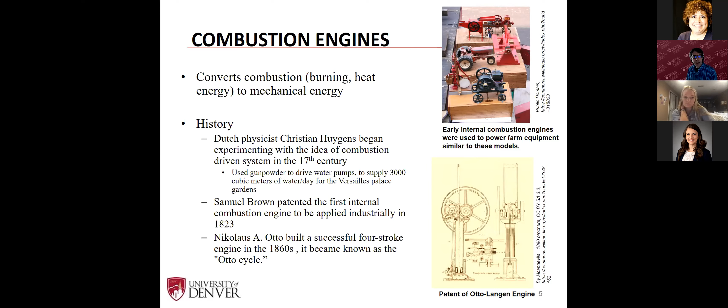We maybe get a third. So maybe a third of that energy in the gasoline goes into making the car run, and the rest of it goes to heat. Your car gets very hot, you have to have a cooling system, and if that goes wrong, all kinds of bad things can happen. So anyway, this is where it started.

A little more on definitions. There's a couple different kinds: external and internal.

Internal combustion engines - Al Gore famously said they're going to be gone, or they need to be gone, if you're worried about the climate, and he got a lot of flack for that. But General Motors has committed, I think by 2035, to not make a single combustion engine. They'll all be renewable or electric or something like that.

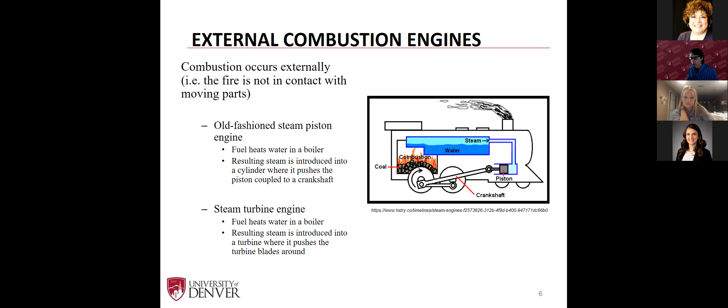And as you know, the wheels on the bus go round and round - I'm guessing you've all heard that song at one time or another. So you need something to help convert the linear motion to rotational motion, and I think that's one of the questions on the quiz.

So internal, just like it sounds, it's all inside. You've got gas, and diesel is a slightly different type of fuel, as you know. Hopefully you've never made the mistake of putting diesel into a gas tank - it's very hard to do, but a friend in the neighborhood did it recently. It's not good. The diameters of the gas pumps are different because they really don't want you to do that.

But otherwise it's pretty much the same - it's fuel with energy, but the big difference with diesel is you don't need the spark. We'll get into more of that in other classes. It's just a property of the fuel, and there are some advantages to that - you can get to higher pressure ratios and so on. Thermodynamics, again, is where you get it. But either way, they're very similar.

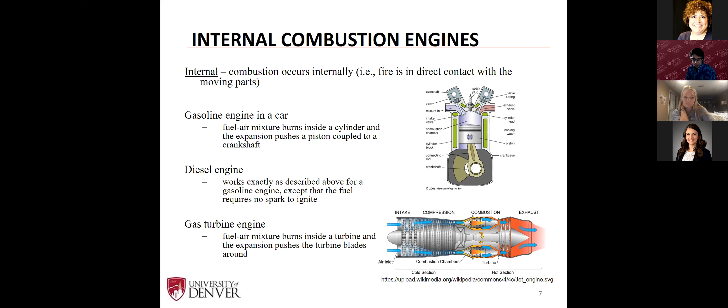What's a little more interesting about this engine is there's a section with a turbine, labeled there. In most engines, you'd extract all the energy you can from the turbine. But in a jet engine, you only want to extract as much energy from the turbine as needed to drive the compression. That leaves a lot of energy left, which goes out the back as exhaust at really high velocity, and that's what propels a plane. It's a fundamentally different process. The combustion part, you don't have the cylinder moving, but otherwise it's definitely an internal combustion engine, and that's why it's there.

All right, next slide, please.

One of the key concepts, maybe you've had chemistry and recognize this, is the ideal gas law: PV equals nRT. Sometimes it's mRT, using mass instead of n, the number of moles or the amount of substance. The key thing here is you've got pressure, volume, and the amount of stuff that's in there. R is a gas constant, so that's not changing. And T is the temperature.

So if we close off the cylinder—in your car, the valves are opening and closing, we'll get into that more—at some point it's all closed, and that's when combustion occurs. So N is constant, the amount of stuff in there is constant, and R is always constant. If you ignore N and R and just call it a constant, put T on the other side, we know PV over T is constant. This helps us work through how things go. When you ignite, the temperature increases, and if the volume doesn't have a chance to expand right away—it happens really fast, so imagine it's constant volume—if temperature is going up, the only way to maintain that constant is to have the pressure go up. We can be more accurate than this, but it's good for predicting trends and understanding how things work. High pressure leads to high force—pressure is basically force divided by area—so if you've got high pressure pushing on the area of the piston, that's what makes it go.

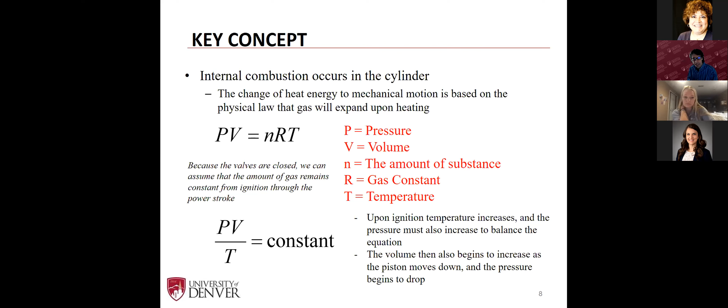So, all right, next slide.

Another key concept—we talked about how almost all engines... I don't know how many of you know about the old Mazda rotary engine. I don't know if they still make it, but Mazda was about the only one with a rotary engine. The idea was, if we start rotary to begin with, we don't have to waste energy going from linear to rotation. But pretty much every car is linear—the pistons just go up and down—and eventually we want to turn that into the wheels going round and round. That's where the crankshaft comes in; it could look like a U in some cases. But in general, this is just how we go from linear to rotation, and there are some losses. Even if you got all the energy of the gas that you wanted, you're going to lose some in this process.

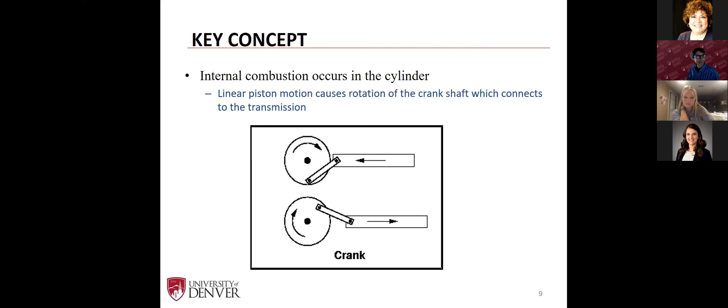You've got rings—this is always one of my favorite stories, being older, you get better stories. Engines didn't work as well or as long as they do now when I was a kid. I had a dad who was a mechanic, so it wasn't as big a deal for me. But if you got a car engine to go 100,000 miles, you were doing great. If you can't get 100,000 miles out of a car now, something's really wrong. A lot of it has to do with those rings—the machining is just so much better now.

The tolerances that they can machine to, your car just runs so much better. They last so much longer.

Overheating - I don't know if you ever saw the movie Duel. I always get the directors mixed up, but one of his first movies was on TV, called Duel. The whole thing was about this car overheating going up a hill, and he has this big problem with a truck. If you saw that movie now, you'd go, I don't get it - what's going on, why is the car having to stop, what is this overheating thing? Cars just don't do it anymore. But when they weren't built as well, when machining wasn't as good, you had to worry about things.

These rings have a lot to do with keeping the oil where it's supposed to be, keeping all the combustion stuff in the cylinder so it doesn't leak out. It used to be you could always see a car with either blue or blackish smoke coming out of the pipe, and the two colors were significant in terms of what your problem was. But yeah, it just doesn't happen anymore.

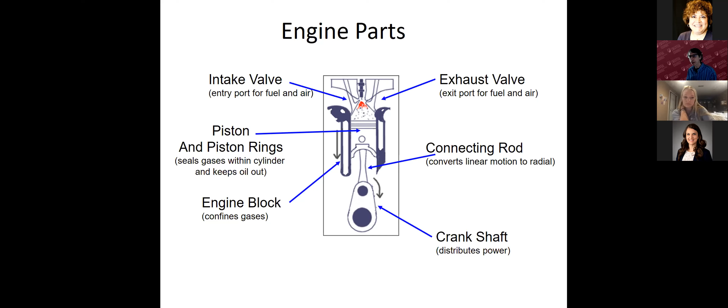Okay, next slide - we'll go in more detail as we go. Here you've got the throttle. The throttle is essentially when you put your foot on the gas pedal, you are connected to the throttle, and that just lets more fuel in, or fuel-air mixture. This talks about the carburetor and fuel injector. Again, carburetors - at least with the cars I had, that's probably where I took advantage of my dad, the mechanic, more than any other time, was my carburetor would get clogged. The fuel injector is just such a better way to go.

Camshaft, that has to do with the timing. You need these valves to open and close at just the right time or things go very wrong. You're probably somewhat familiar with your timing chain. If you've ever done an oil change at like 60,000 miles, maybe 90,000 if you're lucky, you get hit with a really big bill - they'll want to change your timing belt. And you'll go, that costs so much money, I don't want to do it, and you can take a chance on it. But if the timing belt ever goes - usually the chains are better because they're made out of metal, they won't break, but your timing belt is a piece of high-strength rubber - if that thing breaks, then all your valves will start opening and closing at the wrong time. And the piston is moving really fast - if you've ever gotten your car up to 5,000 or 6,000 RPM, that thing is really going fast, and those valves are opening and closing.

You don't want that piston slamming into the valves, or you're going to have an expensive repair bill. So most people will change it, though when you do, you'll always wonder why didn't they build it out of metal. And by the way, it'll be an even more expensive bill, because while they're in there, they'll say now that we've got this all taken apart, we probably should change your water pump.

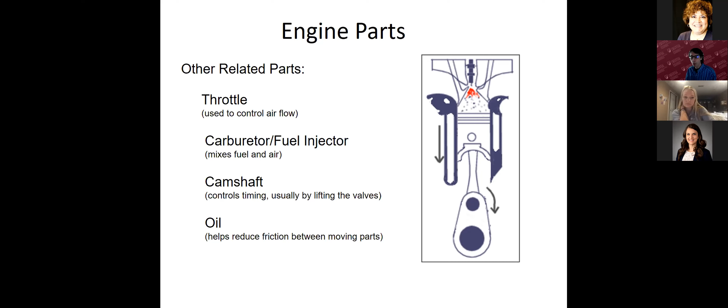All right, camshaft again, that's the timing of when the valves lift. Oil, this came up before. It turns out it's not a scam to sell you more oil. It reduces friction, makes things last longer. And even oil is so much better now than when I was growing up. And it wasn't just that I had to walk to school uphill in the snow both ways, the oil was worse, and cars just didn't last as long. Okay, next slide.

Here you get the 4 strokes. If you knew it was a 4-stroke engine, congratulations. If not, maybe you now know. And this all has to do with the timing of the valves.

Again, a lot of things labeled here, but let's just focus on the 4 strokes. Intake: the intake valve is open, the exhaust valve is closed, and the piston goes from the top to the bottom, drawing air in. Intake, very simple.

Then we close off all the valves so the air can't go anywhere, and the piston goes up, turning a large space into a little space. We compress it, and it gets hot. This is where you have to worry about the gas igniting too soon.

Ideally, you'd only add the gas now, after you compress the air, and you've got that spark plug. This is a gas engine. A diesel engine doesn't need a spark plug, but I won't go into too much detail there—become a mechanical engineer, take thermo. I just taught thermo 2 in the fall; we went all over the Otto versus the diesel cycle and a jet engine.

Anyway, now it's still closed. You ignite it. Now it really gets hot and high pressure, and it pushes on the piston. This is why the timing is also critical. If it explodes while the piston is still going up, now it's fighting you. You want it to explode right when you want it to go down, and that pushes it down—that's where you get the energy.

And then you've got to get rid of all this stuff that's in there. It goes up one more time with the exhaust valve open and pushes everything out.

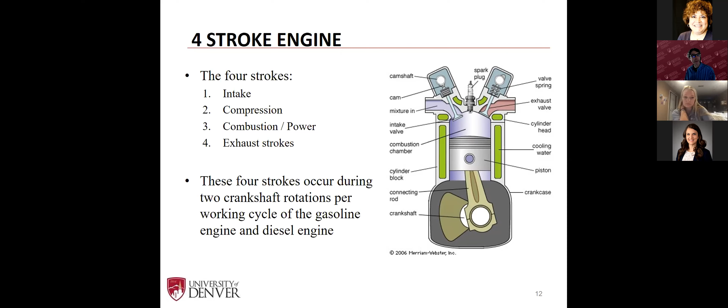Let's go to the next one. I think we get them in detail. So I kind of already gave it away, but this is the intake. As I said, the intake valve is open, and you just draw in air. This is pretty easy—it takes a little bit of work technically, but really a small amount of work to pull that air in. You go from top dead center to bottom dead center.

The crankshaft goes from 0 to 180, if you call that 0, but as it goes halfway down, it goes. So, next slide.

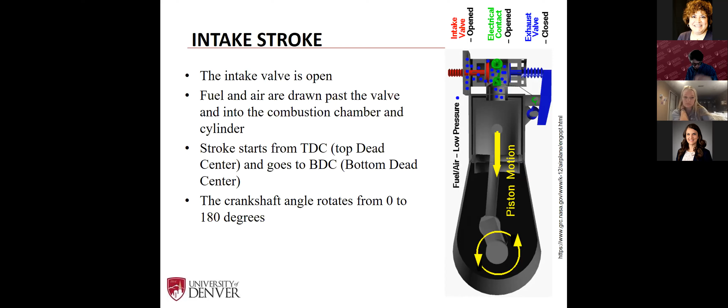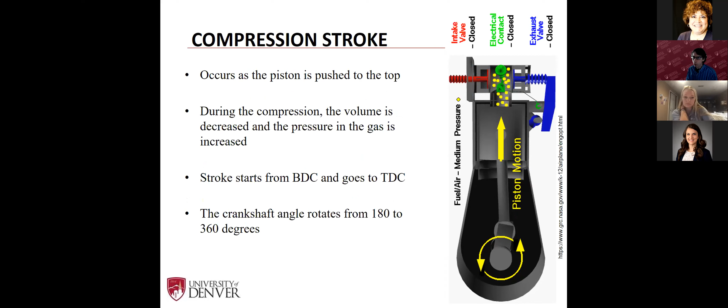Compression stroke, as I said, you've got both valves closed. Now you go from the bottom to the top, the 180 to 360—it's now 1 full rotation. Note, as you'll see, it takes 2 full rotations to make this work, but now we've compressed it all. It's hot, and whether the fuel's already in there because you had a carburetor, or the fuel gets injected next—next slide—we now ignite. This is the power stroke.

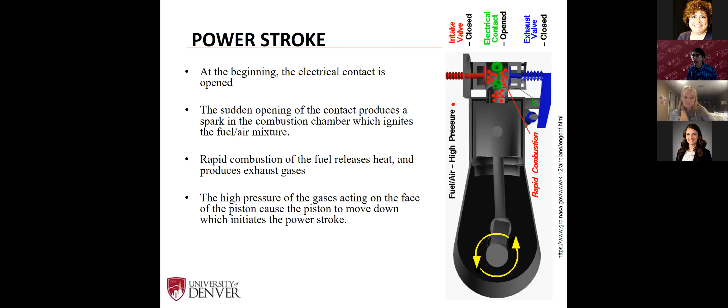So now the spark goes off, or you add the fuel, whichever you have to do. If the fuel's already there, you just do the spark, or you do the fuel injection and spark. That releases a lot of energy in a short amount of time. Again, it's high pressure, high temperature. We really care about the pressure, but they're related, and that pushes it down.

All right, next one. That's the next 180 degrees, so this is now 1.5 - we've gone one full circle, and now we've gone half more. In the last half, we open up the exhaust valve and push this stuff out.

By the way, if you're an engineer, there's so many parts of this you might be interested in. If you really care about climate, and I hope you all do, this is where you really care about - what are we going to do with all these exhaust gases? That's why you got catalytic converters. There's a lot of other stuff that goes in your car, and a lot of clever chemistry.

I don't know how much you like chemistry. I find a lot of engineers don't like chemistry, but chemistry is really important when it comes to combustion. You can ignore it, but somebody needs to pay attention to what's going out your tailpipe, and how good or bad that is for society.

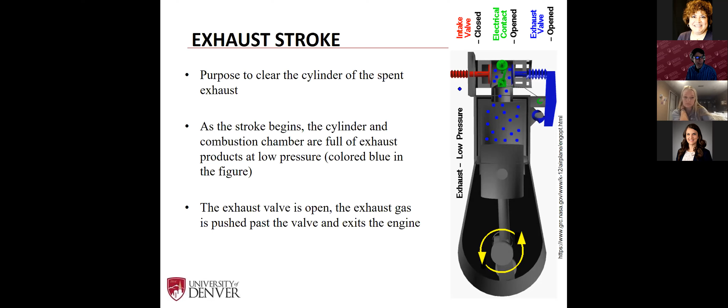And again, you think about the 5,000 RPM, 2,000 RPM, or maybe 1,000 RPM is idling. I don't know if you pay attention to your tachometer, but even 1,000 revolutions per minute, this thing's happening pretty fast. And every 2 times, again, it goes up, down, up, down - that's 1 power stroke that we get for every 2 cycles.

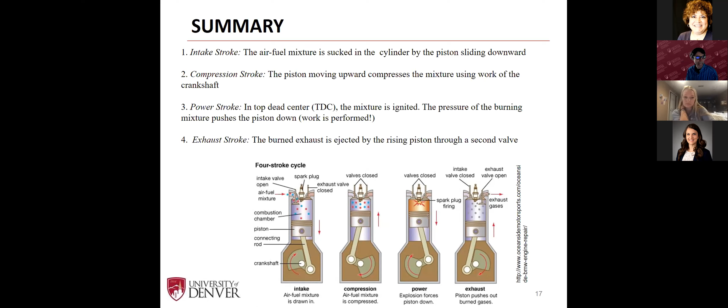All right, next slide. All right, this is great - Dr. Rizal found a nice little video thing, and it seems to be working. So we just talked about 1 cylinder.

If you're like me with cars, I love cars, but I'm not going to spend a lot of money on cars. I pretty much have all 4-cylinder cars. I'm the one who gets passed when I'm going up 70, and so on, anything uphill, and I don't care. 4 cylinders is fine for most of the time, but you can have 6, you can have 8. This is where you've got the V, if you're into this thing, the V configuration where the cylinders are the V. They can sometimes be parallel just on different sides.

My dad being a mechanic, I know I mentioned that, I got to drive a 12-cylinder Jag home. We were a full-service mechanic - sometimes we would take the cars to the customers, we wouldn't make them come. And so it was great for me. He would say, okay, you drive the customer's car. And I will say, I noticed the difference - as soon as I hit the gas pedal, oh my gosh, did that car take off.

Also, by the way, I had a 4-cylinder Porsche, a 912. I don't know how well you know the cars, but it's not the 911. That car from a standstill really had get up and go, but when I was going 50 miles an hour, not so much. That's where you need the higher 911 and so on. But again, it was a lot less expensive and easier to work on.

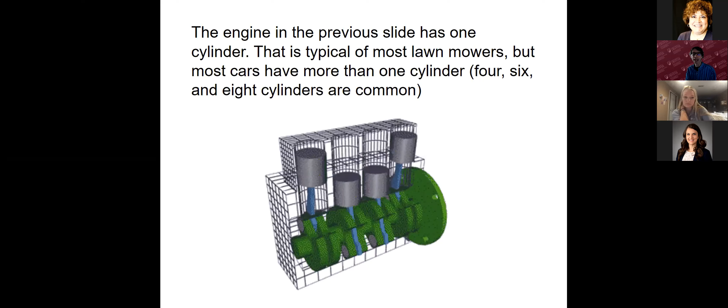But anyway, you can have 4, 8, 12, 6 cylinders, and they can be arranged either in one line or that V configuration. Next slide, please.

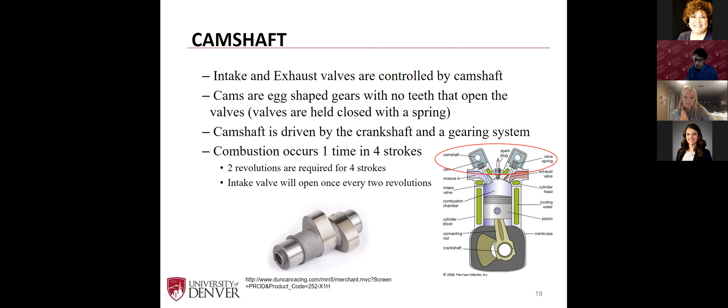And as we talked about, combustion happens 1 time in 4 strokes, so 2 rotations, and that's how this thing's set up. That's kind of why there's 2 of these guys to do the different things. But anyway, you need 2 revolutions to get all 4 strokes and to make it work, and it just has to do with the timing. All right, next one please.

All right, there is a 2-stroke engine and a 4-stroke, and we'll do a little bit of the trade-offs.

As it goes up, it both draws stuff in as it puts out the bad stuff. It's terrible for the environment, right? Maybe terrible is too strong a word, but the combustion isn't as complete. You don't push out all the bad stuff before you bring in the new stuff.

But on a 2-stroke cycle, for every single rotation, you get a power stroke. So you get, in a sense, twice as much energy out per time as you would if you had to go 4 strokes to get 1 combustion event. This is really important where size or weight might be an issue. So you see it in lawnmowers, some motorcycles, chainsaws. It's clever, but hard to make efficient. If you really care about the environment, you want the 4-stroke, or electric, but that's a whole other lecture.

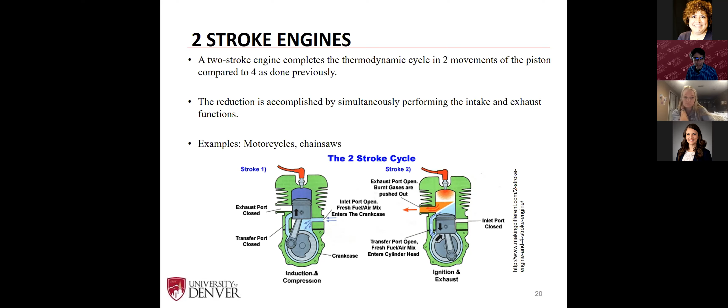But you should know about the 2-stroke. It's still an internal combustion engine, it combusts right next to the thing, so it's a good thing to know about. All right, let's go to the next one.

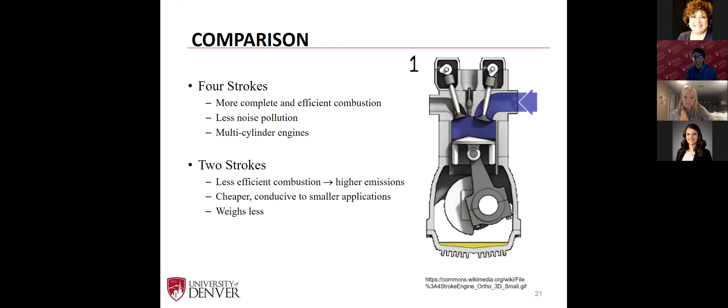Have you ever seen our world go, 'oh, just because it's cheaper, I'm going to do the right thing'? I hope we get there, but society's not quite there yet, maybe we're moving there. It is cheaper and it's better for smaller applications because, in a sense, it weighs less since you get more power out for the same amount of weight, as you get twice the power strokes for the number of times.

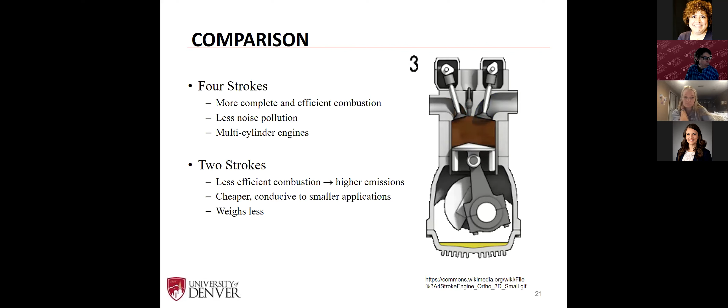All right, we're nearing the end. Let's go to the next one. All right, we are at the end.

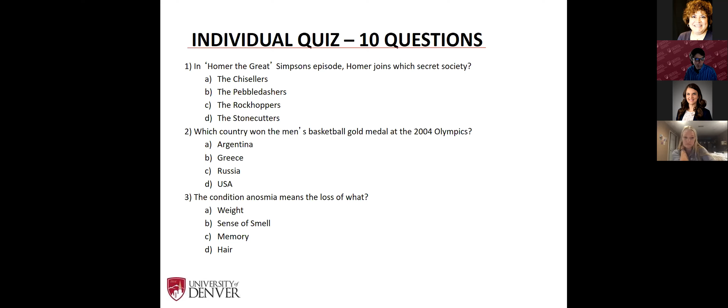Okay, number 3, that one is B. It's the sense of smell, is the correct answer. So let's go to the next slide.

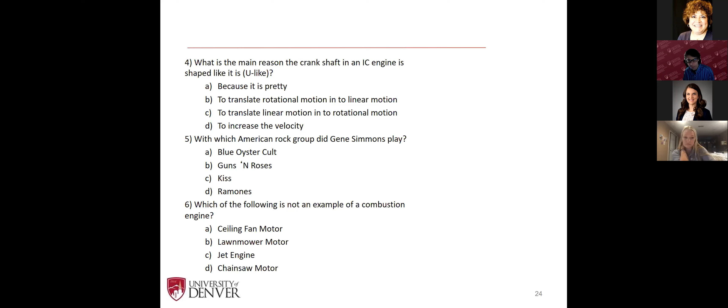7. So 7, I don't know how you know this, but every now and again, some people who are good at this, maybe they live there. I would not have known this one for sure, but this one is Cascade, and Cascade Range is where Mount St. Helens is. And the president, this one is Nixon.

Nixon's got an interesting story. He was a vice president, and he lost a couple times, lost to Kennedy - that was the famous one, the first time there was television for the debate. And Kennedy just seemed to know how to do it. Nixon looked like he was kind of sweating under the lights. And he was like, okay, well, I'm done, right? I mean, I lost the presidency, it's over. And then things changed, and he won later. He succeeded Lyndon after Kennedy got killed. Lyndon Johnson was president, and then Nixon won in '68, and then you got Watergate. And if you like history, there's a lot of good history there, no matter what you do.

All right, the next one's impossible. I think people who even are up on the Old Testament don't know this. And this is by far, when the scratch off - this is almost always the one where people get it last. But the answer is D, it's 150. And I haven't verified these, so if you go in the Old Testament and find out it's wrong, you can email me and I'll be happy to change it. But I got this from what I think is a very good source on bar trivia. And I'm sure the internet is never wrong. Or is it always wrong?

Or anyway, last one is another one. Hopefully you got what is the purpose of the oil? And I love D - again, I think I got these from Dr. Rozelle, so she gets full credit for that one. This one is B, it helps remove friction or reduce friction in the moving parts. The heat sink one could be tempting - it has to do a little bit maybe with cooling, but that's not its real purpose. It indirectly is involved in that process, but it is B there.

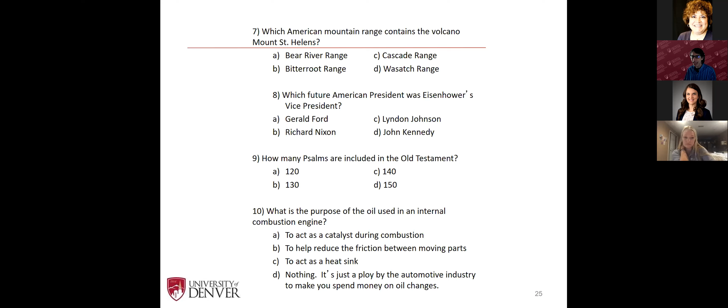So, okay, we are completely done, you now have the answers. If anyone wants to chime in and just say - anyone, I've never had a 10 out of 10. So you could just be saying it, I don't know for sure, but that scratch off card doesn't lie. And we grade hard - if you even slice it a little bit, we count that against you.

Some people, they move the stars around. The company that did this is genius. I don't know if I got any teachers in the group, but if you are teaching, these things are just amazing. They're not very expensive, they're fun. But yeah, because people worry that they move the stars around, so people can't say, oh, I know where the star is, I'm going to just do a tiny little thing they'll never notice. Anyway, they're a lot of fun.